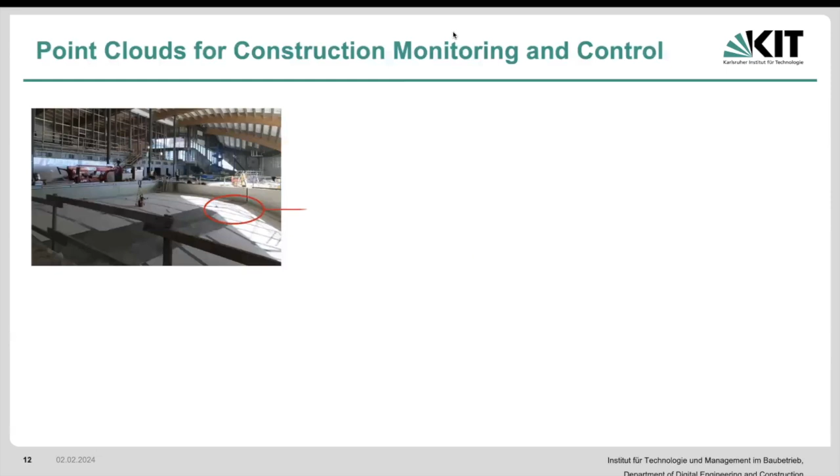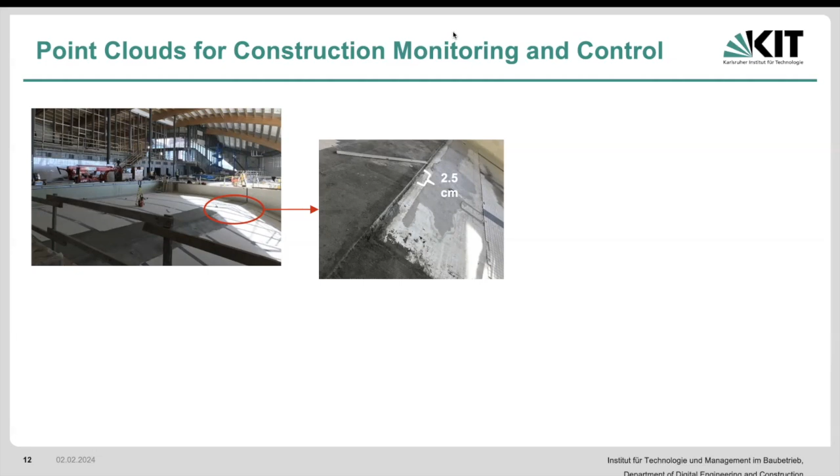We've talked about how our whole process of construction monitoring and control is carried out, right? We said, if there are going to be some deviations between the planned and the actual, that deviation needs to be first measured and then compared with the actual. And if there is any deviation, that needs to be identified and improved. And we said, in this case of the competition pool, there were some mismatches with respect to the dimension. So there are some quality control issues.

With respect to that, we were able to utilize point clouds and laser scanners to extract that information. Once we have that information, we would be able to gather what we want in terms of our key performance indicators. In this case, our key performance indicator is basically whether the dimension matches together with the tolerances between the point cloud, which is what has actually been built, and our BIM or whatever digital model we might have, right?

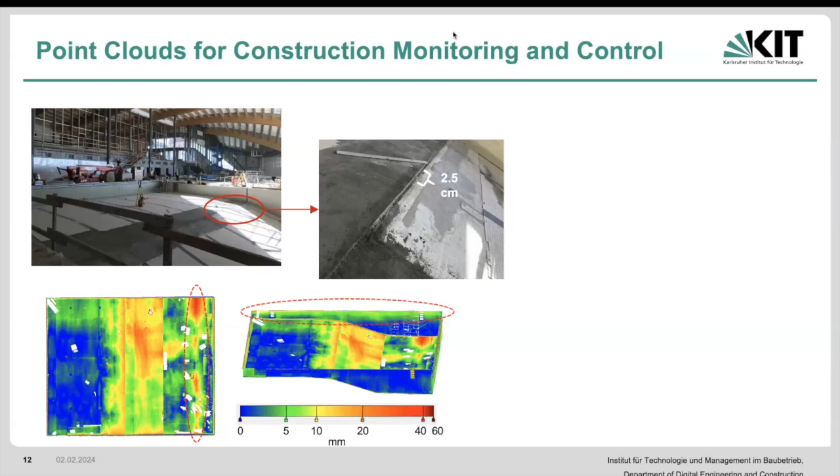And we also mentioned that this goes hand in hand with our cost influence curve, right? What that means is that as the project life cycle increases in terms of time, our degree of influence on a change is going to decrease and the cost of change is going to increase. So whatever type of deviation we're trying to measure here, the earlier we identify it, the better.

Now, how can we guarantee that we are going to identify these deviations earlier from a data collection perspective? How can we guarantee that? Or how can we reduce and mitigate the risk of late identification of deviations? Any ideas? So if we want to identify deviations as early as possible in terms of data collection, can we?

Regularly, exactly. So the frequency of data collection becomes very important, right? The more frequently we collect the data, the better chance we have of detecting these problems early on. For instance, if we do it every 4 weeks and a deviation occurs at week 1, what is going to happen? We've identified it 3 weeks later, whereas if we were doing it every week or twice every week, we would be able to identify it much better, with much more accuracy and frequency. So frequency becomes very, very important for the timely identification of these deviations.

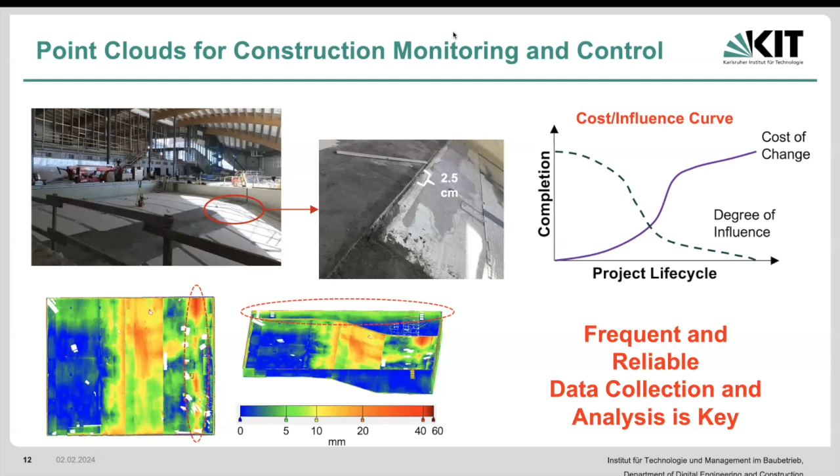A point cloud is basically a bunch of 3D coordinates of our surrounding areas. If we utilize a terrestrial laser scanner or something like this, every surface of the project is represented by a bunch of points, okay? What do we have to do? We have to analyze these points in a way that we can identify what those surfaces are, and then whatever information we want. For dimensional compliance, we need to identify how well the surface and dimensions of the object comply with our plan. In terms of progress, we need to see whether that particular object is observed and present on site.

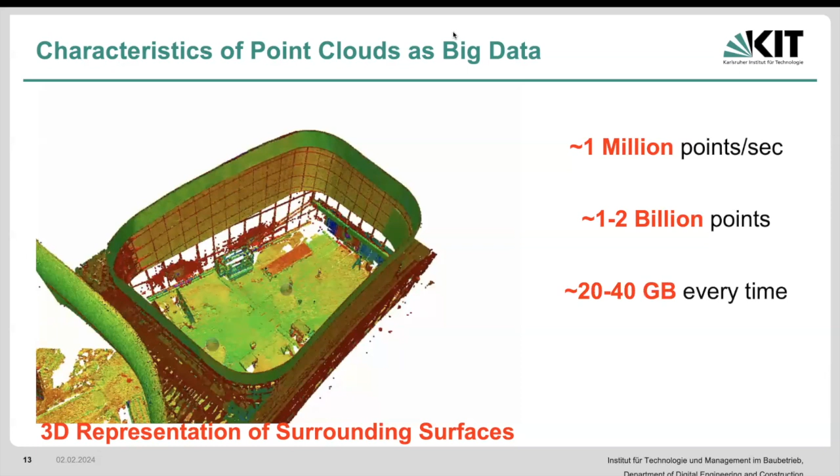So with respect to the different information we require, we need different types of processing of this point cloud, okay? But what does that mean? That means we still need to collect this and analyze this. In terms of the data itself, you have about 1 million points per second that you're collecting. Every monitoring session is going to be around 1 to 2 billion points, 20 to 40 gigabytes every time. Let's say you're doing 10 different monitoring locations, okay? And if you're doing 10 projects in 10 days, this would be 2 to 4 terabytes in 10 days.

See, it accumulates very, very fast, right? So now there's going to be a give, right? How frequently do we want this information, versus how much risk we are going to be accepting if there is some mismatch? That risk is going to be accepted, okay? That's what we're basically sacrificing here. There could be a possibility of a mismatch, there could be a possibility of a discrepancy, but because of this large data, we would have to basically manage that in that sense, okay?

And with that being said, point cloud is one of the types of data in construction projects that is actually identified as big data. Now, what this means is that this big data needs to be somehow managed in order for us to be able to get the construction analytics that we want from it, or the information that we want from it, right? And what we still want is to be able to manage this while being able to have frequent data collection, because we do not want to sacrifice that. And that is basically the area that we want to improve.

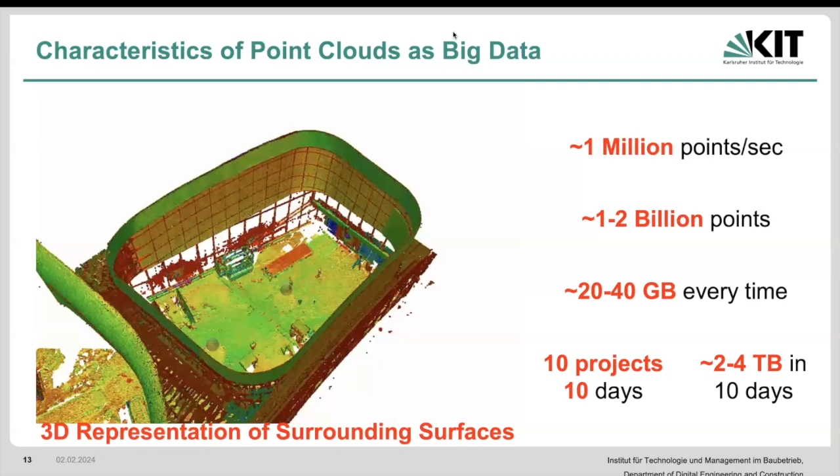We might need that, let's say, every day, but in reality, for practical reasons, we might get this information every 10 days, right? We want to be able to see how we can utilize technology and different strategies to still maintain this every day that we require, or as frequently as possible, without sacrificing in terms of the data management and various different aspects with respect to that, okay?

So let's talk about what type of analytics we can do and what is the process of preparing our data in order to gather the information that we want from it, which really is our key performance indicators. So we have some data, we need to process that data, analyze that data, prepare that data, and then get whatever information that we want from the other side of it, okay?

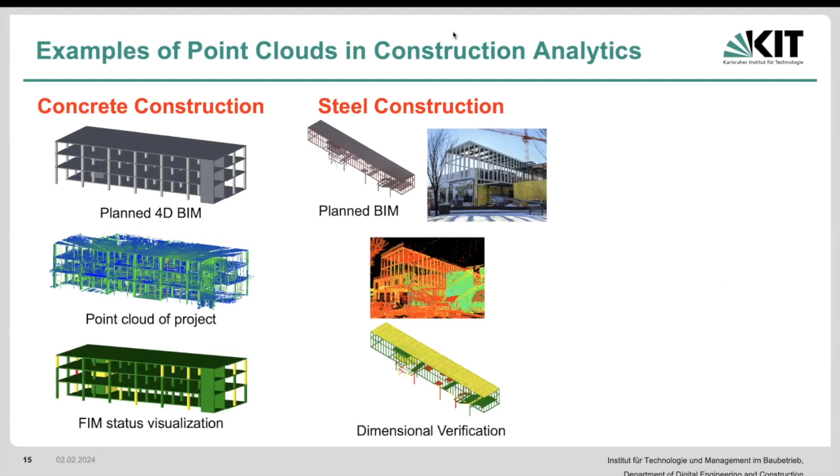So some examples of these: we talked about how we can utilize field information modeling to get the point cloud, our 4D BIM, and then identify the status of the project with respect to progress and dimension. We also talked about how we would be able to perform point cloud processing to get dimensional verification, as well as static displacement monitoring. Or in terms of industrial construction, we talked about how we would utilize point clouds to extract the information regarding the flanges on these modules before they are shipped to site, because the locations of these flanges become very, very important for us.

Why? Because this module is going to be built in a factory. It's almost the size of this room. Then it's going to be shipped to site. When it's shipped to site in, let's say, minus 30 degrees in Canada, we need to know that the locations of these flanges, where these pipes are going to be joined, are going to be in the proper location. How can we guarantee that? We need to get the point cloud and extract the information that we want from it prior to it going to site, and verify that. Once it's verified, it can be shipped to site, and over there they would be able to be matched, right? So there are ways to extract the information we want from these point clouds of construction elements.

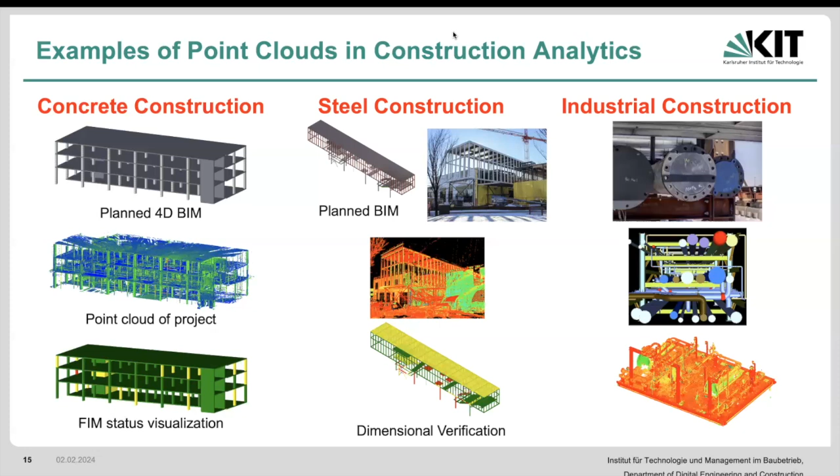So what is the process of preparing our data in order to even start with this? There are some typical steps in big data analytics. One that was specified by Microsoft has 4 real steps. You collect the data, you process the data, scrub the data, and then you analyze it. So in our case, what does that mean? That means that we collect the data. Our collected data is point clouds, right? Using laser scanners, using photogrammetry, whatever method.

Then you have to process this. That means that you have to summarize this information as much as possible to what we want. In this case, for instance, I have a bunch of planar surfaces. I need a process to automatically extract planar surfaces from these point clouds. And now my point cloud has been summarized into a set of planar surfaces with some boundaries around them, okay? Then the second part of this is the scrubbing.

Here, what I would say, the scrubbing is how much detail we're going to be needing in terms of our KPIs with respect to what has been planned. So how do we want to summarize this information? How are these elements identified?

What it is from our plan and from our information that we need to be able to extract there. And this scrubbing is coming from our plan side and from our BIM side. Then these two need to be joined together through some analysis so that we can finalize those deviations that we want here. Okay, so this is the process of big data analytics for the preparation of the data in order for it to be utilized for construction analytics for us.

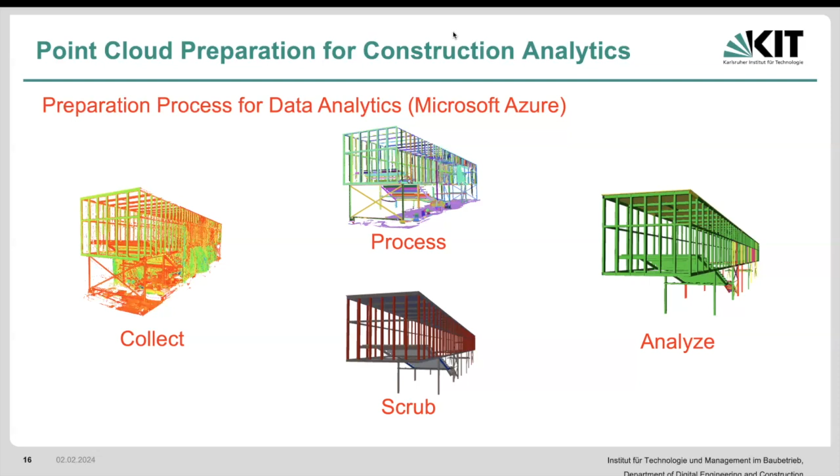Now, I'll give you examples of how this could be utilized in earned value management in order for us to get the information that we want from it with respect to different levels of analytics. So there are really four main types of analytics that you can perform. Does anyone know what those are? Never heard of it? So we have four major ones. One is descriptive analytics. The second one is diagnostic analytics. The third one is predictive analytics, and the fourth is prescriptive analytics.

Descriptive means that we want to describe the data that we have in an understandable fashion. As an example, earned value analysis. If we can get all of the data into one simple curve that would show us whether we are going to be ahead or behind schedule in an overall project duration, that is an example of a descriptive analytic. Let's talk about diagnostic analytics. That means how some deviation has happened. This means what type of activity and why that activity was behind schedule.

A predictive analytic means what kind of prediction can we actually get? What type of method can we utilize in order to predict the data and the pattern of the data, based on previously identified data that we have, how can we predict what's going to happen in the future? And then the prescriptive analytic means what type of prescription can we provide to this disease that we have, which in this case is going to be delay in construction. What type of actions can we take and prescribe in order for us to meet the deadline?

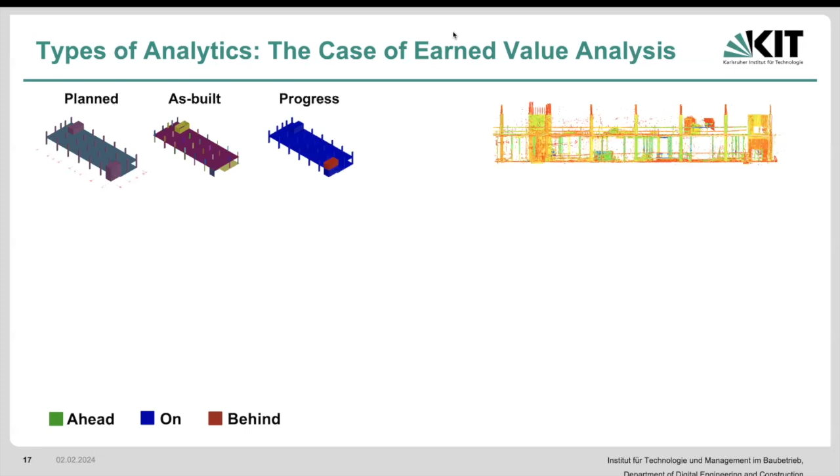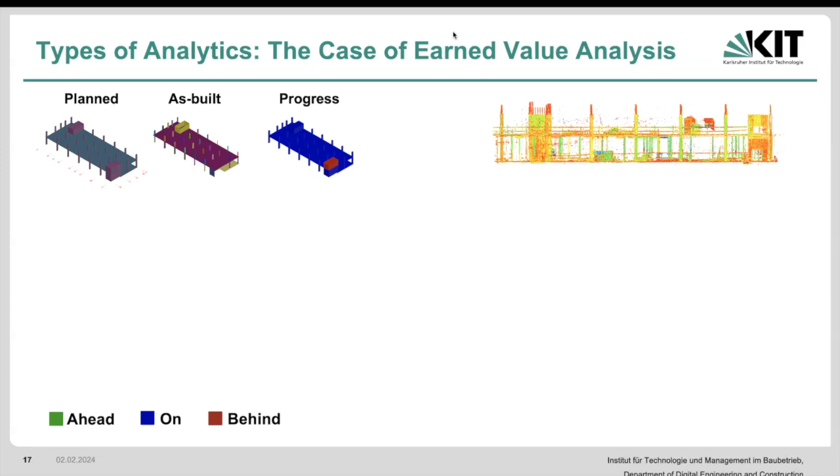So I'll give an example of these four types of analytics using earned value analysis and point clouds. So every time that we monitor it, we go through all of those processes of collect, process, scrub, and analyze, right? We get to this point. Once we get to this point, we can utilize the information that we extract to develop a descriptive analytic of the status of the project. In this case, earned value analysis for delay.

If the budgeted cost of work performed is less than the budgeted cost of work scheduled, what happens? So if our work performed is less than the work scheduled, it's a delay, right? So we would be able to identify this at project level in a very simple description, how it's going to be performing. What about the why, or where is this particular problem happening? When you go back, we would be able to see the type of activity that has some delay. This is a type of diagnostic analytics, meaning that we can find the source behind why this has happened.

Now, there are other aspects to this as well, different levels of analytics that you can get. For instance, exactly why this activity was delayed. Some of it would be able to be identified through point clouds. Some of it would not. We need additional data, right? But in terms of what we can get from point clouds, at least we can find the diagnostic of what type of activity was delayed that caused the overall project delays. Then we can look further into it, right?

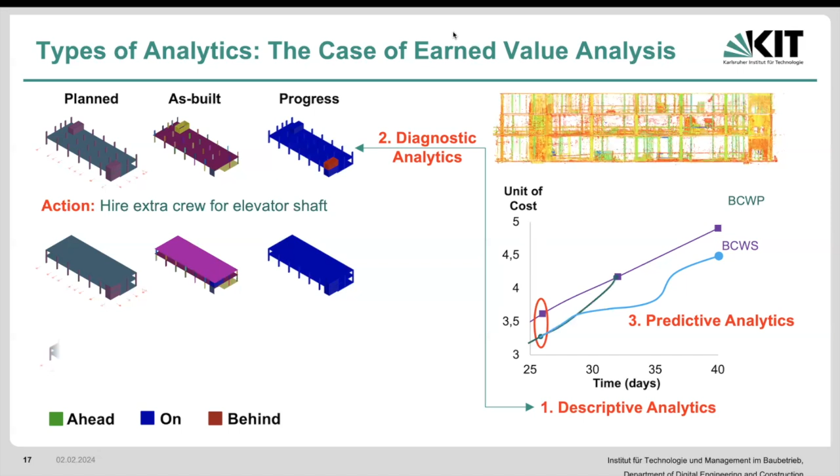What does that mean? That means that we can now have an action plan that we have and a response. When you have many of these available, then we can actually prescribe a particular action in case similar circumstances happen, right? Which is a type of prescriptive analytics. Because once we do it on multiple occasions, using this action, we now have an action that is related to some outcomes, right?

So later on, a similar situation could happen, and we have many of this data and many different actions. Then we can decide which one of these actions we're going to be taking in order to satisfy and solve the problem that we've had. So

essentially, in theory, if we can actually utilize point clouds for this in many projects as frequently as possible, and we can have our action plans when we take actions measured as well, we can relate all of these together to create a closed loop of our descriptive analytics, our diagnostic analytics, predictive analytics, and prescriptive analytics as well, so that we can utilize it for the

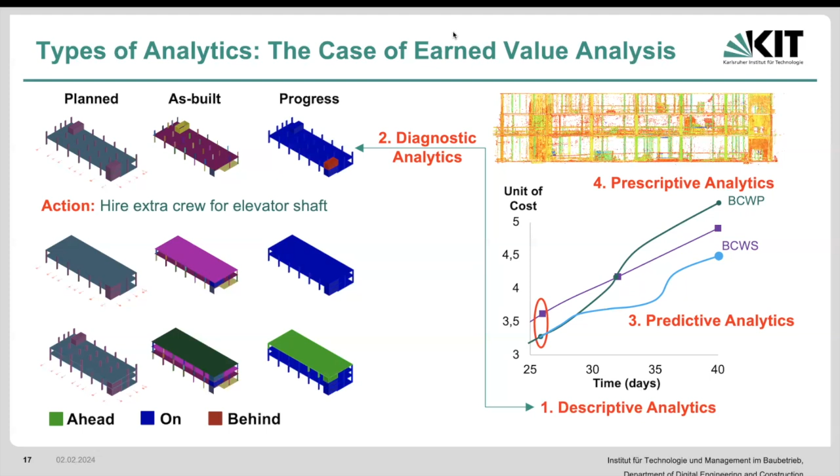future. This is one example of the benefits and how one simple data, together with some minor addition of different types of actions that we would take, could actually support our data analytics as a whole. Make sense? Yeah? Okay. So what is the real challenge? Why is this not being used? Why are we not basically taking this?

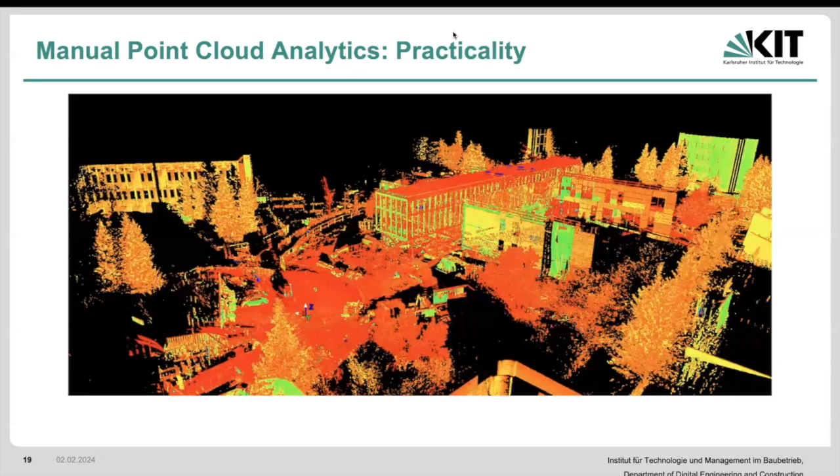Well, obviously, one is with respect to the amount of data that exists, right? But then what is the real bottleneck here? If we have many data, then we would have to automate that, right? But the bottleneck is exactly in the automation. If we want to do this manually, we've also talked about it, all of these elements, every time that you're measuring it, how are you going to be able to even extract the information?

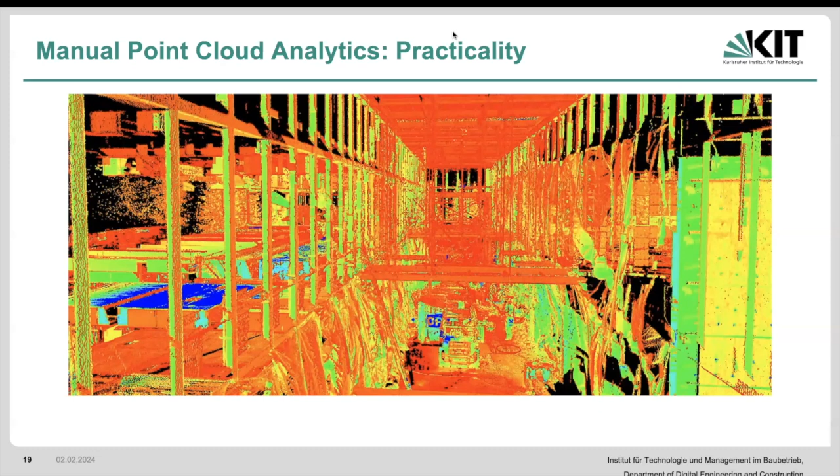And you guys did one example of that particular column that we did, right? In a more semi-automated way, how long that took. Imagine you're doing this on different construction sites or on the same construction site multiple times. It's going to take forever, okay? So it's not practical in terms of being time consuming.

That means that even taking out of consideration the amount of data that we have, it's just not possible to process and analyze that information on time to be able to utilize it. If we're getting it every day, but our processing is going to take 2 weeks, it's not even going to be useful, right? And that's what's important here.

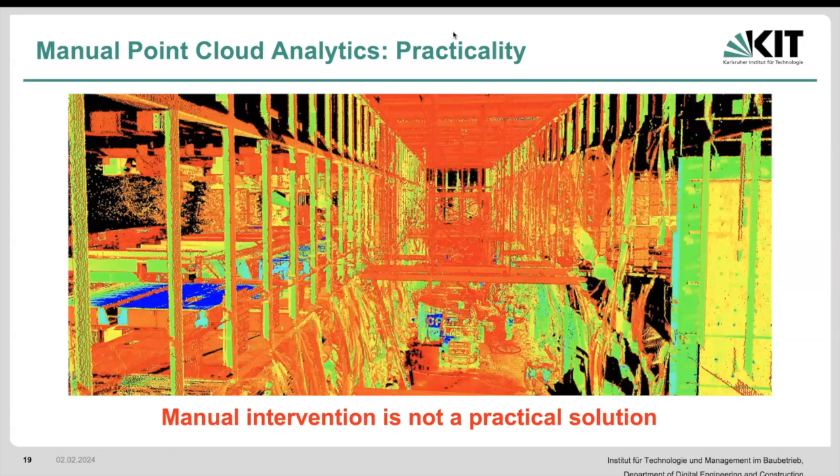The other side of it is with respect to subjectivity. We talked about the fact that if we have, for instance, the same set of points, on the top right there, rebar, that I gave to 6 different colleagues of mine, what they provided were different selections of these points, and every time that you fit a cylinder to it, it gave a different result, and that is different from what you can get analytically from these results

as well. That means that the processing also becomes subject to the person that is analyzing this, and we want to reduce that subjectivity as much as possible. And this is a prime example for automation. So if we can, yes.

You mean the sizes of these? Yes, yes. So this has, I think, like a centimeter or less in terms of its diameter. This was like 2 centimeters. So from the minimum to the maximum, I would say maybe about half an order of magnitude, maybe like 5 times more. So you go maybe 2 to 3 or maximum 5 times, but it was considerable.

Why? Because especially when you have missing data, you're going to have problems with that. If you have missing data, then you would have to really model it in a particular way. Now, if you're extracting that and you don't extract it properly, it's not going to give you the full picture. As an example, this was a project that I did, and I'll talk about this as well. There's one problem.

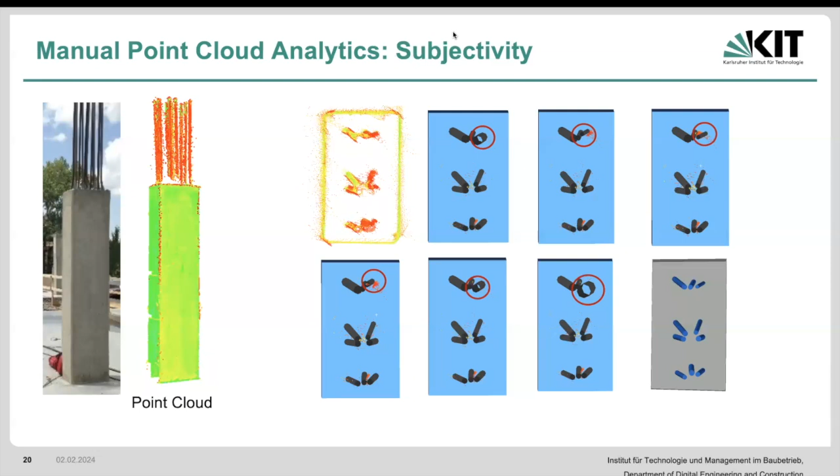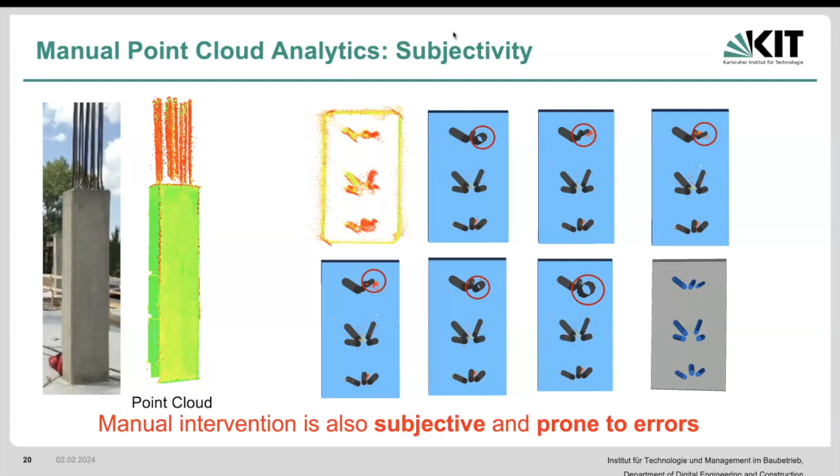At the end of the day, we are looking for millimeter or sub-millimeter deviation, but even from one person to another, you might get, let's say, a 5 millimeter deviation. If we can reduce that as much as possible and remove the subjectivity, that is where we're going to aim. So manual intervention in this case is also subjective and prone to human error. So what do we get?

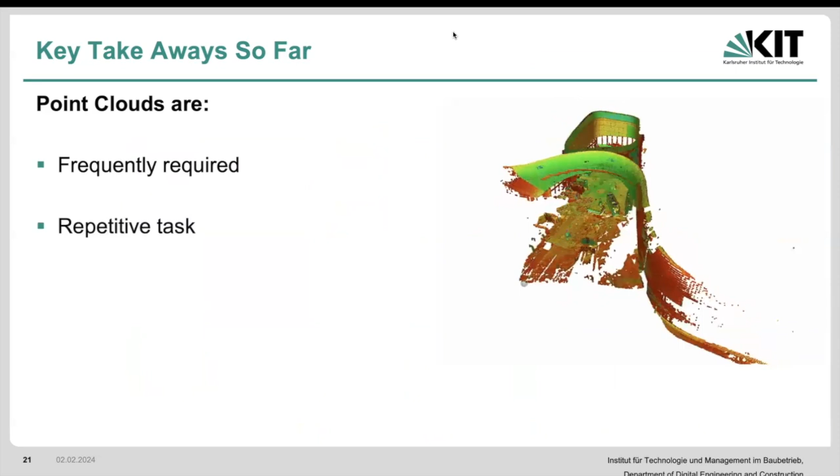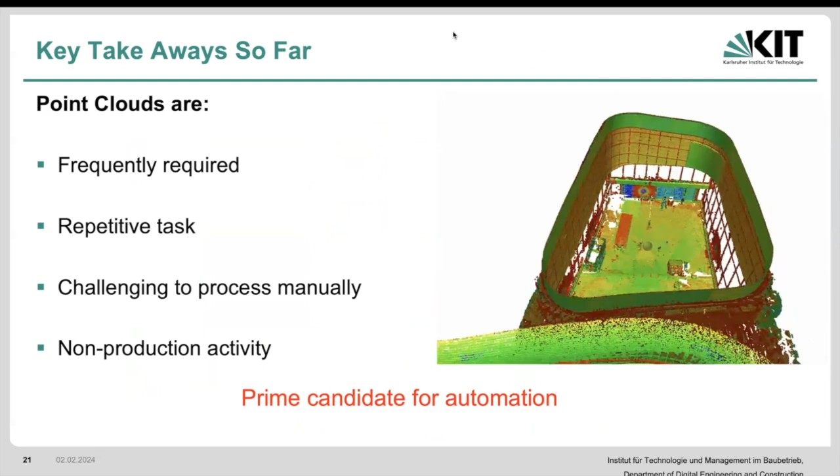Right now, we have identified that point clouds are a frequently required, repetitive task, challenging to process manually, and it's a non-production activity. No one's going to pay you for going through the point cloud and assessing whether what you have built matches reality, what the plan has been. Why? Because you get paid for production activity, to produce something. You don't get paid to recheck your own work.

Now, that doesn't mean that it's not valuable, because if you have a mismatch or discrepancy of some sort and you can identify it earlier on, that's much better than identifying it later, both in terms of liability and in terms of meeting the project credentials, right? However, it's generally a non-production activity. So these are the aspects that make our problem of point cloud processing a prime candidate for automation: repetitive, non-productive, frequently required, and challenging to process manually.

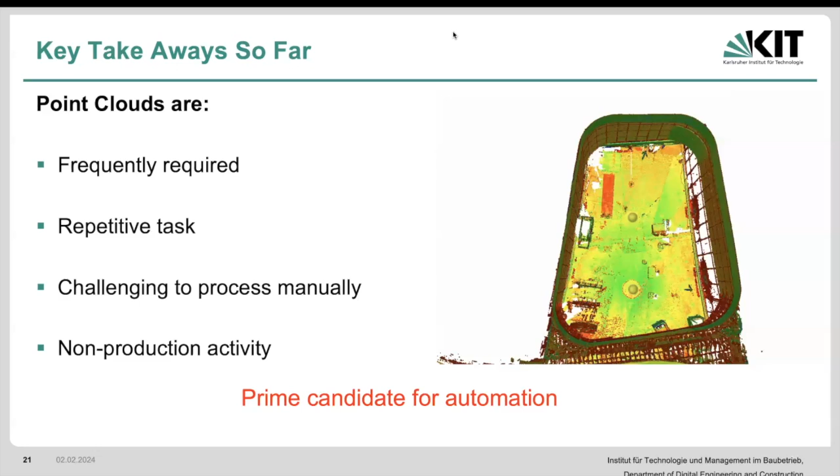So now we have a system that provides big data, and we need a process to minimize as much as possible the challenges with manual intervention. So we need to automate. I'll give you two strategies that have helped me manage these point clouds as big data: dimensionality reduction and the devising of a monitoring plan. So let's talk about construction analytics and the preparation steps for point clouds.

We have the collect step, which means that if we can reduce as much as possible the number of points required, as well as the time it takes to collect this data, that by itself can improve our overall processing. Let's say I have no plan, but I think a scan station here, here, and there will give me as much data as possible, as opposed to having an optimal number of scan stations that give you the information you really require and nothing more. This optimization can significantly benefit the next steps as well.

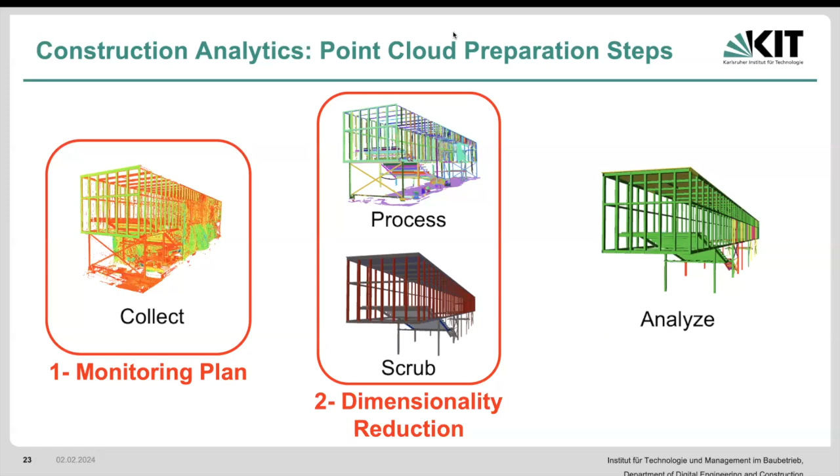Then the second step is, how can we utilize dimensionality reduction? What does that mean? We are looking at three-dimensional points. If we can reduce the dimensionality, this by itself can considerably reduce the processing times and analysis, and it simplifies our problem. So these are the two strategies that I'm going to be discussing with you.

The first, developing a monitoring plan. So we have to devise a strategy to simulate what point clouds look like before going to site. Why? Because we have some digital model that we're going to be utilizing. Inside of this digital model, we have different information, from the type of material, texture, various things, depending upon the level of detail and development that we have for that particular model, okay?

Using that, what are we going to be getting? We're going to be getting where we're going to be placing these scan stations in order to acquire the point cloud that is going to be as accurate as possible and covers all of the elements, right? And provides us with the information that we want, let's say in terms of the density and various aspects, okay?

So how many of you guys have played these first-person shooting games? When I was in high school, there was a very popular game called Counter-Strike. Very interesting game as well. But basically you have a line of sight between your gun and that crosshair, and whatever surface is going to be there as well.

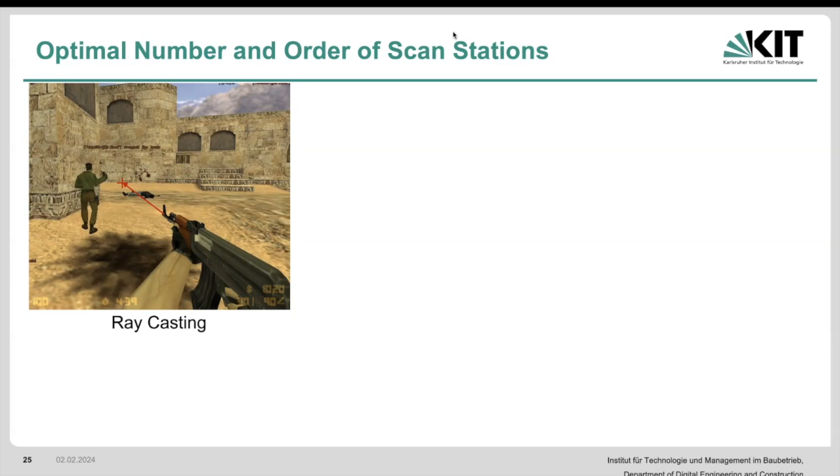This strategy, which is a raycasting strategy, can be employed to simulate point clouds in a model that we have, because this environment is also a digital model, right? And we want to make sure that when we shoot the gun, it's going to go in a straight line into that particular location that we want. So here we can utilize the same strategies in order to simulate the point cloud at a particular location.

So what does that mean? If we have a particular location inside of our model, we would be able to identify the point cloud that is going to be generated if the scanner is in that particular location, in terms of density, coverage and accuracy, because we can model all of these. Now we can remove it, move it to another location and get a bunch of other ones.

What do we want? We want a combination of these stations that would give us various different aspects, meaning we want to minimize the number of points. That's the major aspect that we're looking for, while minimizing the number of stations, maximizing the accuracy and maximizing the coverage. So this is a prime example of an optimization problem.

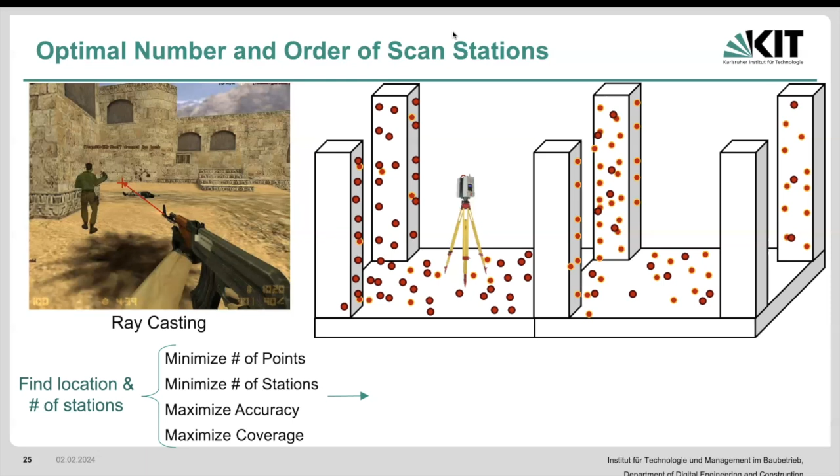Once we can identify the function that would provide us this, then we can utilize various methods, including artificial intelligence-based methods. In my case, I use quadratic unconstrained binary optimization, where you can actually use that type of method with some adjustments inside of a quantum computer as well, and it would give you very good results.

So this way, we have a monitoring plan where we can utilize computational and optimization methods together with our digital models that we've modeled very accurately, to identify the locations that need to be visited, the scans that need to be carried out, and in what order these stations need to be visited.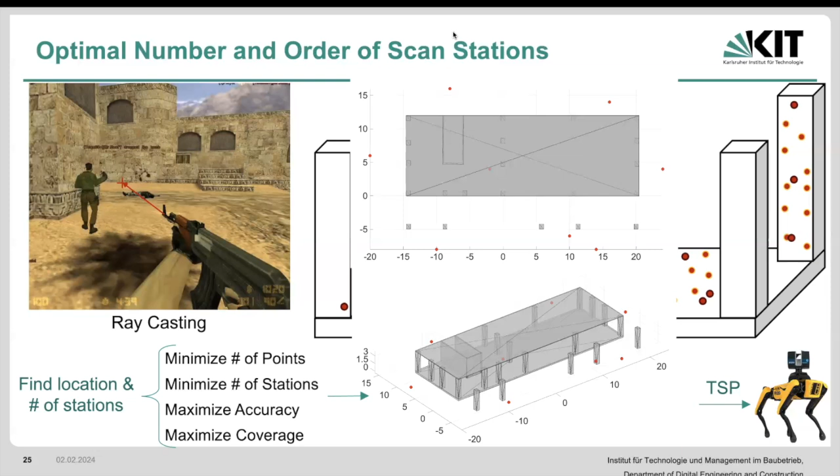The second one is with respect to our processing and analysis, essentially the processing and the scrubbing. So one thing that I'm going to be talking about is dimensionality reduction. Meaning if we can simplify our problem, if we can creatively think of a solution that could reduce the dimensions of our problem from 3 dimensions to anything less than that, that would be significantly beneficial.

Why? Because now we're computing on a lower number of dimensions. This by itself would reduce the computation and would reduce the burden of managing point clouds as big data as well. So I'll give you 2 strategies with this. The first one is floor detection. So if you have a leveled laser scanner in a particular place, you know it's going to be leveled with respect to gravity, okay?

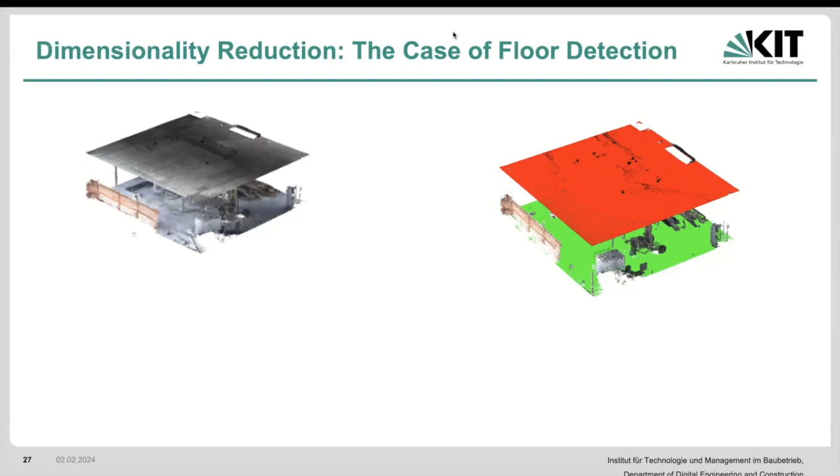This by itself would provide the opportunity for us to identify what the floor and the ceiling are going to be. Why? Because for a room like this that has a floor and a ceiling, if you take a look at the histogram of point height, there's going to be 2 peaks. One is going to be on the floor and one on the ceiling. And actually, this is going to be your assignment next year, if you choose to do the field information modeling class.

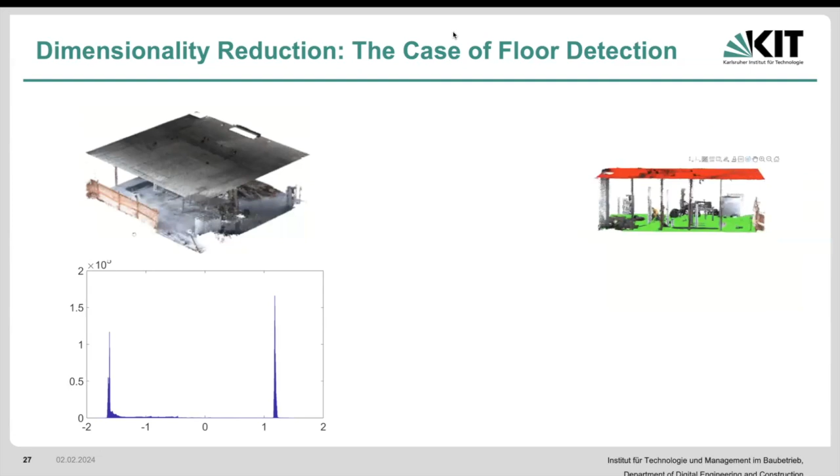This is going to be one of your assignments. As you can see, if you move in that direction, you're going to have a lot of points on the floor and a lot of points on the ceiling without significant change in height, right? Why? What are the points on the floor? Points on the floor are the points that have the same height, because they're all on one floor. And the deviation that you see here is the random measurement error going up and down for that particular point.

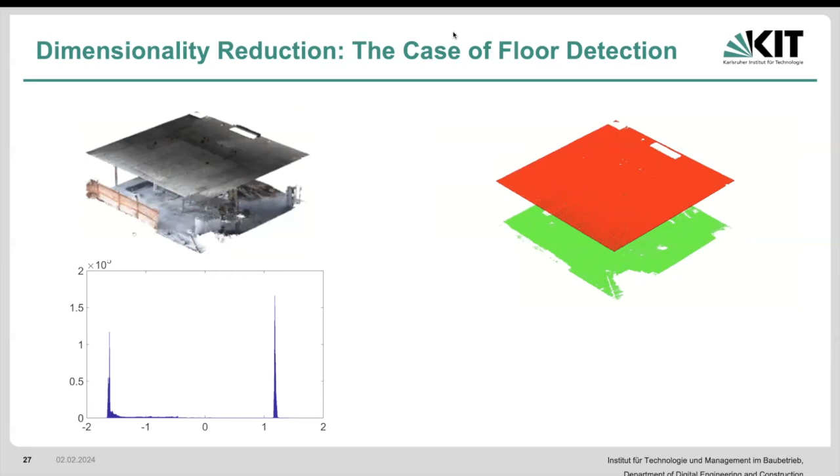But they are going to be similar to the normal distribution. They're going to distribute themselves around a median, right? So you have these points on the floor, these points on the ceiling. Now I can identify all of these points from the floor and the ceiling only using the height. So 1 dimension. I can gather all of this information, and you see this part and this part are much more than all of the rest, right?

So in many cases, for instance in rooms or especially on construction sites when you don't have the envelope walls built yet, you just have skeletons, the majority of the points you're going to have is the floor and the ceiling. And next semester in field information modeling, you're going to see this very clearly using the point cloud data that I will provide to you. If you just have these columns and the floor and the ceiling, the majority of the points is the floor and the ceiling.

So because of that, and because we are removing 80 to 90% of the points every time, using only one dimension versus three dimensions, that would be around 15 to 25 times different in terms of computation. This means 1 day versus 15 days, you see, it's huge. Just by simply defining the problem, changing the parameters, and thinking about it more creatively by reducing the problem's dimensionality. Make sense?

Over half of all the points are removed. In these cases, it could even be 80%. Half is typically removed in a room like this. I even have examples with these tables. You can actually remove these as well. It would be somewhere like here. It's not going to be as much, but it's going to show somewhere in the middle here. So you can even remove the tables because they're more or less the same height.

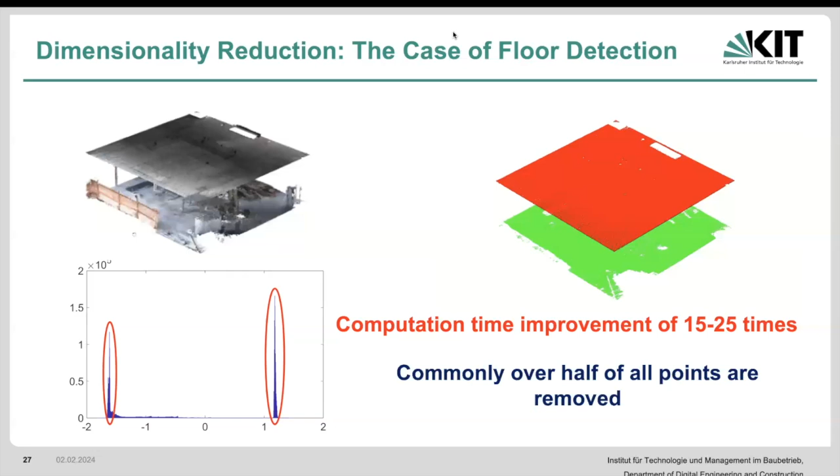That's just something interesting to know as well. So the other one is the case of pipes. Pipes are cylindrical elements. Again, by going back to how cylinders are defined, any cylinder and any randomly oriented plane, if they are intersecting, and we take the points that are closest to that plane, it's going to give you an ellipse.

Now, the problem of cylinder detection in 3 dimensions is reduced to determining ellipses in 2 dimensions, by projecting the points that are close to this surface onto the surface, let's say within 1 centimeter of it. Then we determine the ellipses from those particular points.

So there are 2 benefits here. One is that I'm only looking at points within 1 centimeter of this. That significantly reduces the number of points versus looking at all of these points at once to find the cylinders, right? The second part is that I'm looking at it in 2 dimensions versus 3 dimensions. Both of these together have a significant impact on how well and how easily I can identify the cylinders.

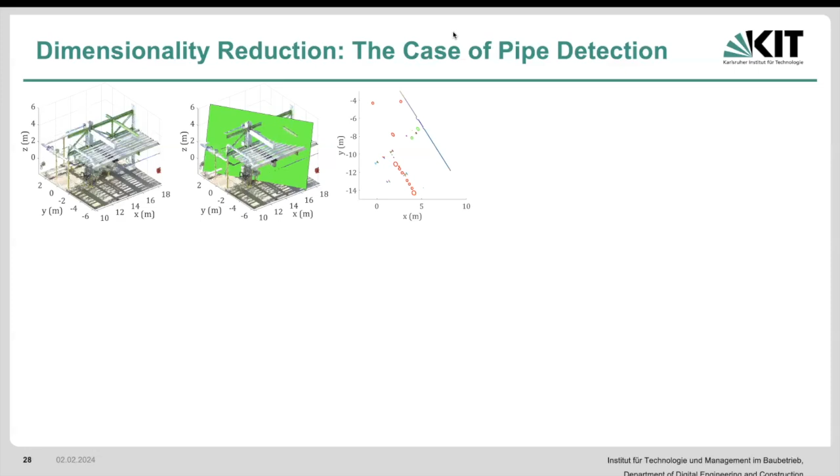Once I have these, I can use the very old result from Dandelin's spheres that proved the relationship between the dimensions of those ellipses and the parent cylinder, if you have the normal vector of the plane. This was solved in the 1800s. So you can use this information to get initial parameters of the orientation, direction and radius of your cylinder. Each one of these is going to be a cylinder that you have.

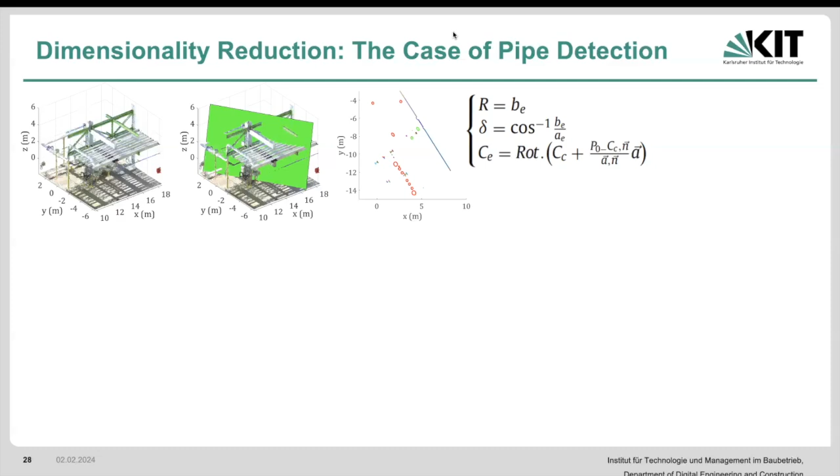Then you find the best cylinder with respect to that. You select only those points and fit a cylinder to them. It's a very simple process after that. The problem is weeding out where these cylinders are. That is the major challenge here. And then you would be able to extract them.

Computation time: we're only dealing with a small number of points, say on the order of 10,000 versus 10 million or 20 million, and we're doing it in 2D versus 3D. Both of these impact it significantly. Then you can use this for various aspects, for instance pipe detection and classification, as well as other analytics, as you can see here, progress reporting for pipes and how much pipe has been laid.

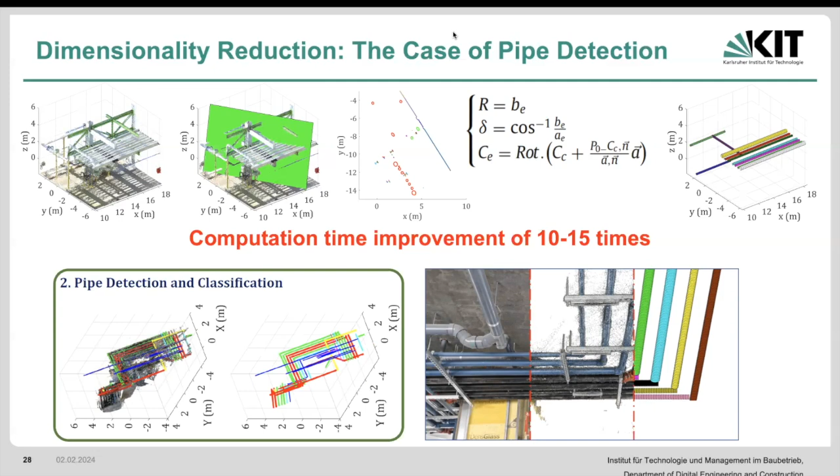Yes. Those dimensionality reductions, do they have to be done manually again? Which part of it? All of it? Or maybe you have to define the plane? Okay, yes. The plane part, the way we're defining it here, can be done manually very fast. The only thing you need to do in your software is take 3 points and it cuts a plane. That's it. As long as it crosses the cylinders, it would cut them. There are also very simple methods to identify that automatically.

The other part is that cylinders in, say, industrial plants are typically in the 3 principal directions. So you can easily go 1 vertical, 1 horizontal, and 1 randomly oriented, and identify them fine. Even if you do it manually, requiring only 3 points, you would identify each one of these. But yes, that's the one part that might require a bit more intuition to automate: selecting the plane that cuts these.

But if you don't want to do that, it's very simple. This part again uses algorithms. From this part going forward, what you get is simply this: you are reducing cylinder detection in 3 dimensions to ellipse detection in 2 dimensions. It's an easier problem to solve, basically reducing your dimensions. For this, I have algorithms that do it automatically, and for this as well, I have algorithms that do it very fast and effectively.

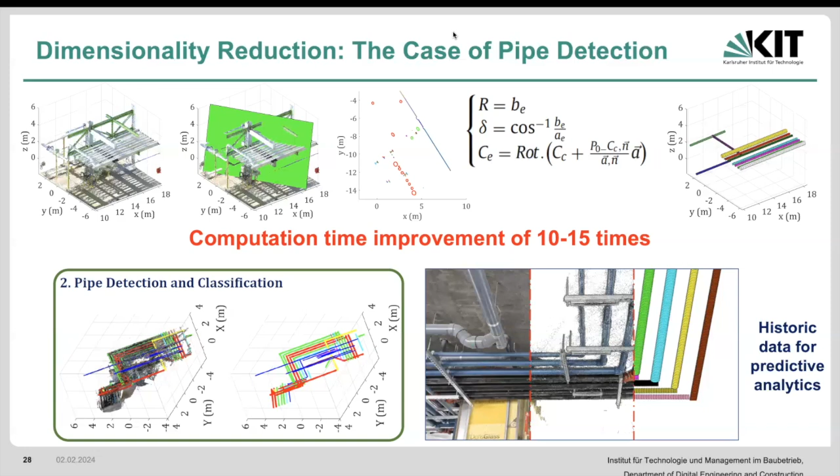So from historical data, you can now use this in your predictive analytics, right? If you have 50 different times that you've collected this information, you have different types of information with respect to progress. Now you can say, okay, if I have progress in this way for a similar project, what is going to happen in the future? So the more data you have, the more chances you have in predicting what is going to happen, because then you can find the patterns, right?

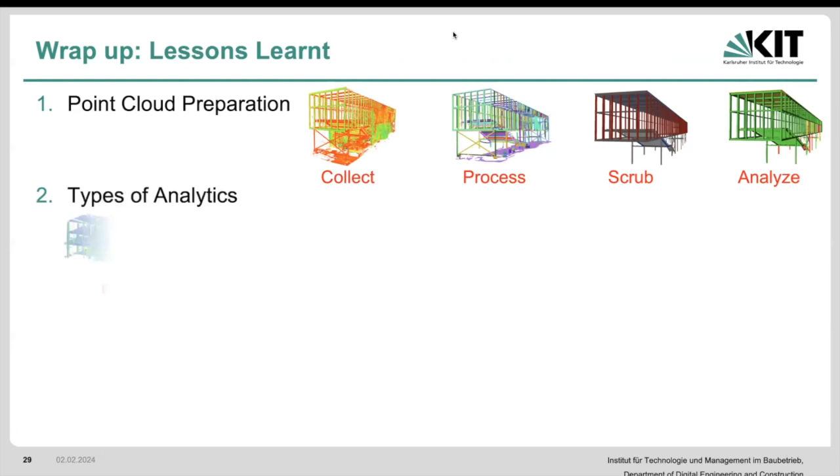Okay, so what do we learn? This is the wrap up of this course: point cloud preparation, collection, process, scrub, and analyze. Types of analytics. We talked about point cloud, 4D BIM, analytics, and how we can utilize earned value analysis to get our descriptive, diagnostic, predictive, and prescriptive analytics, or what steps are necessary to do that. Then we also talked about the two strategies that have helped me significantly in dealing with our big data analytics here.

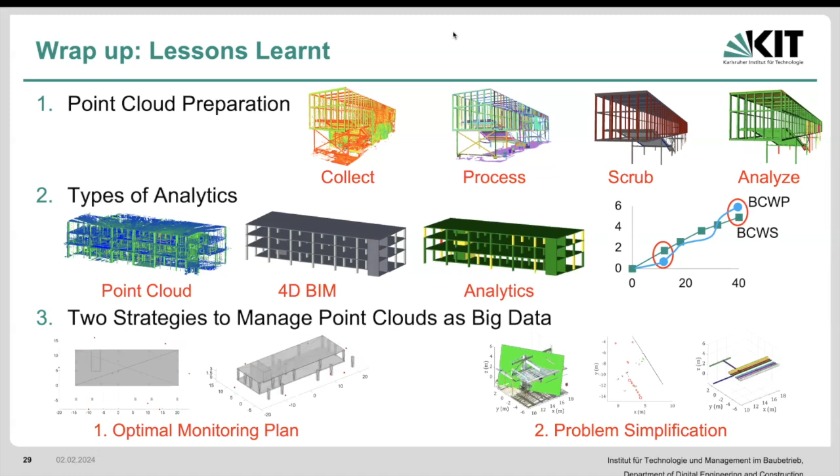The first one is optimal monitoring plan, to find the locations and the order and how you're going to manage and identify the location of each and every one of these. And then the second one is the simplification by means of dimensionality reduction and understanding the problem by itself, right?